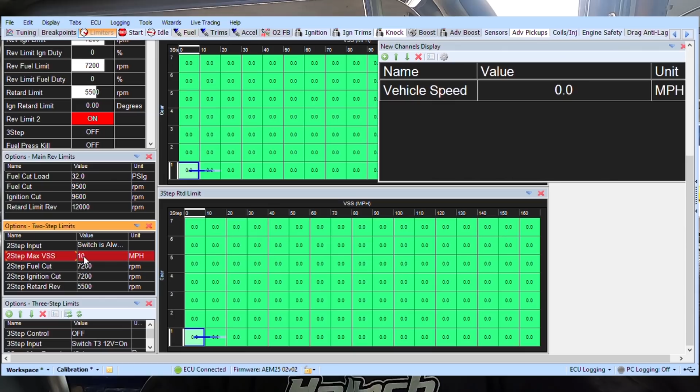So I had basically been told that the data was wrong, that it crept a little bit and the speed had gone way up, and so the 2-step let go. But I'm right now on the dyno, and I'm finding that the vehicle speed versus what the dyno says the vehicle speed is matched completely. So I guess we had to jump through these hoops to find this out, and I brought you guys with. We find out what I find out. I don't hide anything from nobody. Kind of part of the fun.

I think I moved the 2-step max to 10 miles an hour. Maybe that'll help him some, but I feel this thing's ready to jam.

But if you had to set this up because speed was all out of whack, you wouldn't be able to adjust the speed through the AEM, which would be nice, but they don't have that feature. So you'd get a Dakota digital box or something like that to translate the speed into something different, if you had different size wheels, tires, etc.

Now we have the speed sensor on the rear, and we use the Hall effect sensor, which is 12-volt power, signal, ground on the rear, same as a factory one in the front. And having the 4 pulses per revolution seems to work perfectly with just using the rear lug nut studs. So that's going to be that. Simple enough. So I guess that's a little tech tip from Brent, PFI Speed.

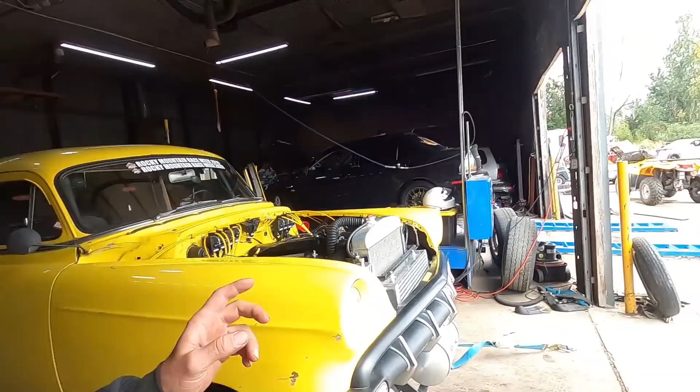And then we need to adjust the clutch too. Yeah, the clutch needs adjusted. Yeah, it's all the way at the top. Definitely needs adjusted. Yeah, I noticed that when I pulled it up yesterday. That's only, yeah, I mean, that's the biggest thing. That's a huge light switch, yeah. And he said that's something he screwed with before that last run. He did that and moved the seat. Yeah.

Well, at least we know the speed is on point. It's perfect. So, like I said, we used the all-wheel drive dyno to do that, coupled them together, drove it a little bit. Now we know, and knowing's half the battle. So we'll get on to the next thing.

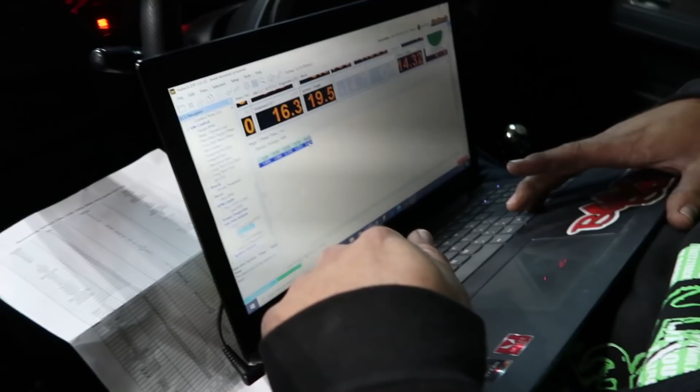All right, guys. So as we gear up for Raceweek 2.0, Rob is back with his old little hot rod, and he won the gasser class at the last race, which, congrats, Rob. It's pretty awesome. He's just gonna give her a little checkout right now. We're gonna make a pull or two. I think we're good to go.

So we got her strapped down. We're gonna add one more in the back here, so we got 4 all together, and then make a couple rips, and then off to Tulsa.

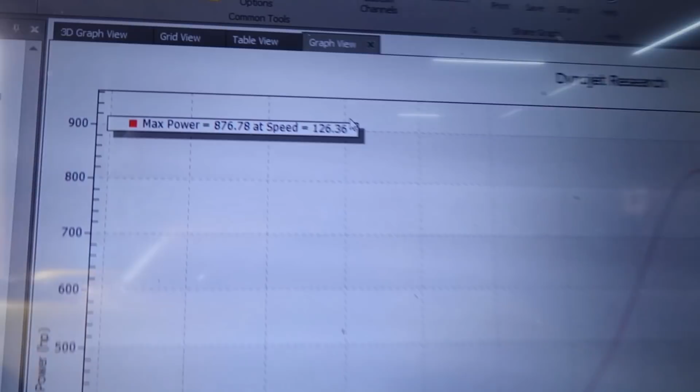All right, on top of having Rob's hot rod here, we've got Jonathan's on the dyno here as well. And they're switching it over to Haltech right now. Jamie's hard at it, and we might get to see where this turbo can really go. Pretty excited about that too. So he's working on getting it just a run, getting a base map in it, building a base map, getting it ready. All right, let's make some tugs on this thing.

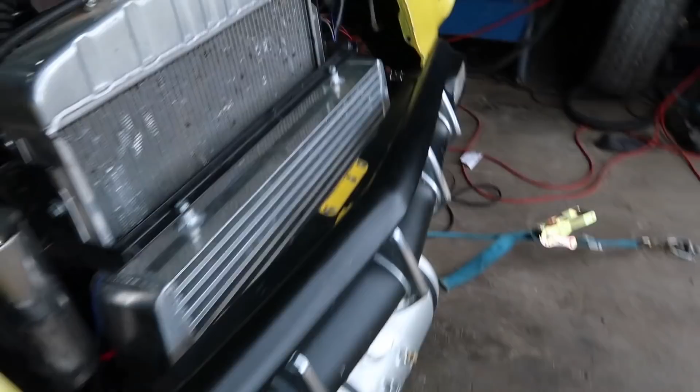What do we got? It's a tranny. My buddy filled it, he overfilled it. We sucked a bunch out of it. Okay, apparently it's still a little overfull.

Tranny's just puking some. It's overfull.

So you made 876, and then it fell really hard. And it sounded like a jammer.

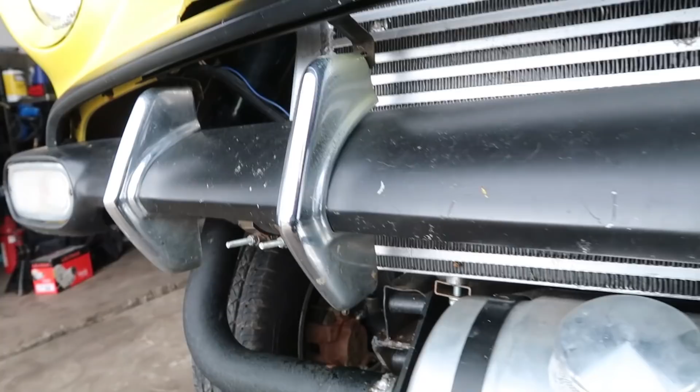All right, so we're going ahead and smoke testing this guy. It looks like, right down here - no, it's hard to see. We're smoking a little there. We got a lot of smoke up here coming from this guy. 2 or 3 pieces right there. Looks like everything else on this side's pretty good.

Well brother, that was 937. It still felt some at the end. Is it just losing boost there, you think? I'm not sure. Definitely got to find out though.

Okay, try to look at this log and find out what's cooking here. Heck yeah. Is that the most we made with it? By far. Heck yeah, good job boss.

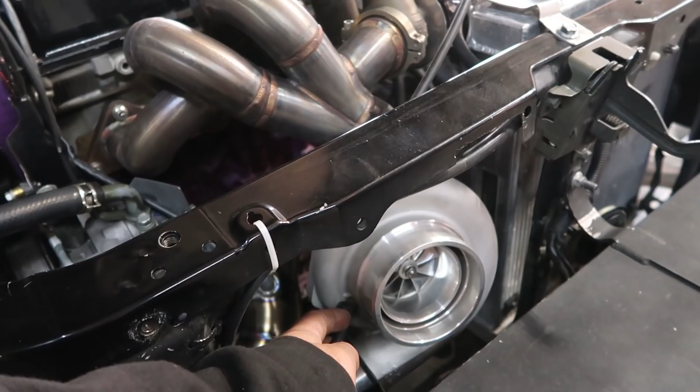He closed the gap and I put some dwell in it, so combination of the two. You're lighting it now. Yeah, and if I could do boost by RPM, I feel like I could pick that back section up, but it's all by time for the drag strip, so just want to try to clean up everything I can.

So just keep going from there. There you go buddy. Yes sir.

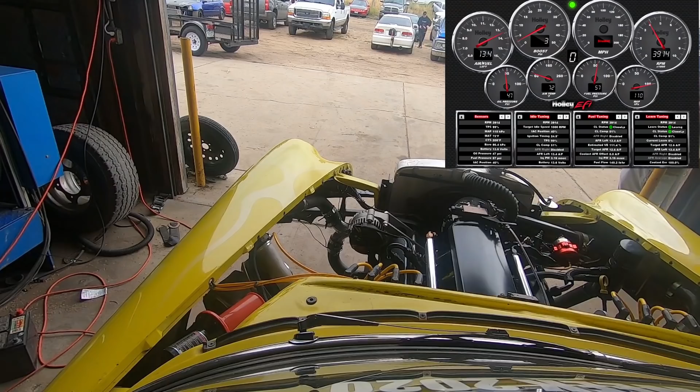All right Sean, so I made a pull and it went right to my boost cut. Oh yeah, and I told you, and you came out and looked. So this port on these Pulsar turbos is actually for a speed sensor. Yes, so it doesn't really have a good source right there.

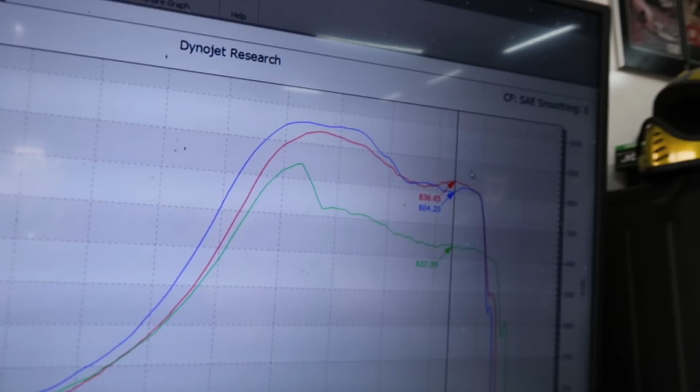So we're gonna pull the pipe off, and you're gonna weld a bung on the pipe, so that we can put the source there. So everything else is working real good, we just got to get a good source, and then we can get control of the boost. Jonathan's gonna go ahead and get this pipe off, Sean can weld a little bung on there.

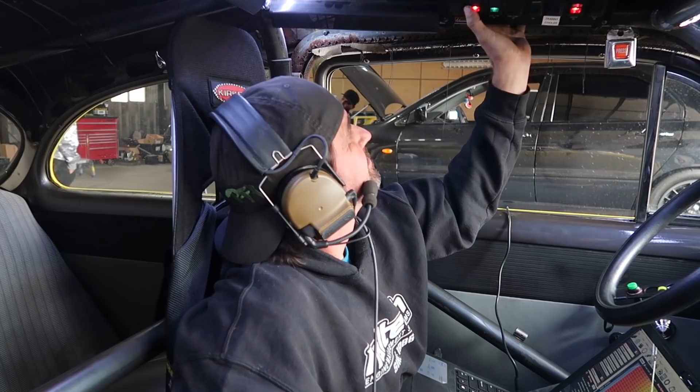Out farther. 959, sir. Carried out farther.

Trying to find your own. The beast. That's for sure, yeah, it is a damn beast. Yeah, I love it man. I do too. Trying to figure out the drop off. Everything looks really good.

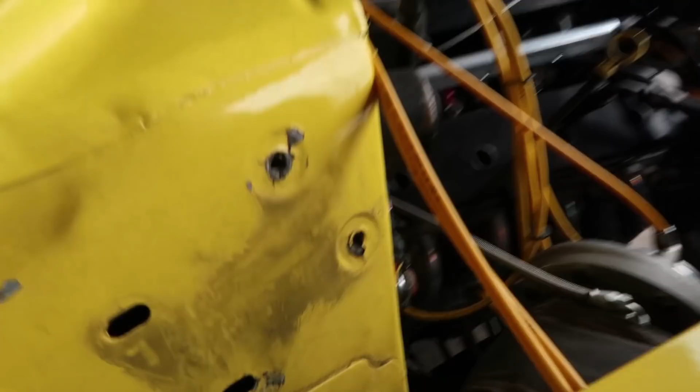Is it the boost falling out or? It does come down, it comes down about 2 or 3 pounds. Man, where's all this? Is this?

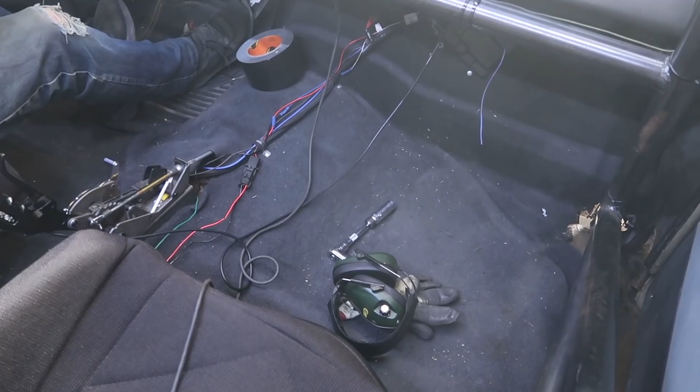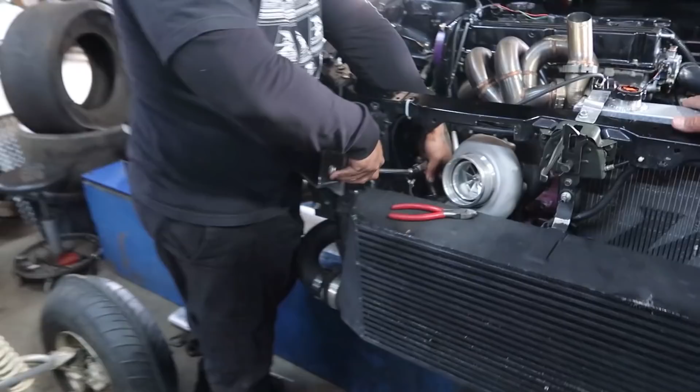Look around, thank you sir. I'm not seeing - you want to look around? I've kind of got some smoke inside, I don't know if it's just coming from the wastegate. Wastegate's blowing right back at the roll bar right there. I gotta get my hook on it. Okay, cool, cool, yep, it hits the hole in the roll bar right there, it's pointing right at it.

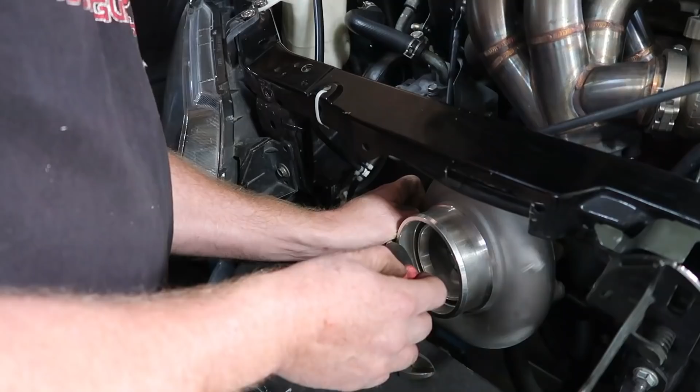Melt the carpet a little bit, yep, right there. Yeah, I got my pieces in for that the other day, and I just hadn't got that far. And we were out messing around the other day, and Chris was like, wow, there's a lot of heat coming in over here. And I looked over, it's like, oh yeah, wastegate's pointing right at your feet.

Oh yeah, you got a fitting on there for us. 3 days later - besides wastegate spring setup, you have any idea? No idea, we're about to find out. One zip tie, and we are ready to rock and roll.

Sean, you want to give me a zip tie? This thing's kicking.

You had 2 things happen to you - 36, you had 2 things that happened to you. The airline came undone just as you started, and then I had the kink, so I'm grabbing it and holding it up. First I plugged you in because I was like, what's kinking him? You weren't kinked, the air was undone laying on the floor. Yeah, that does unkink it. Yeah, so I was jumping around, running around. I got Sean, I'm like Sean, grab a zip tie, I'm holding it up.

That was what, 730? Yeah, 730 and 39 pounds.

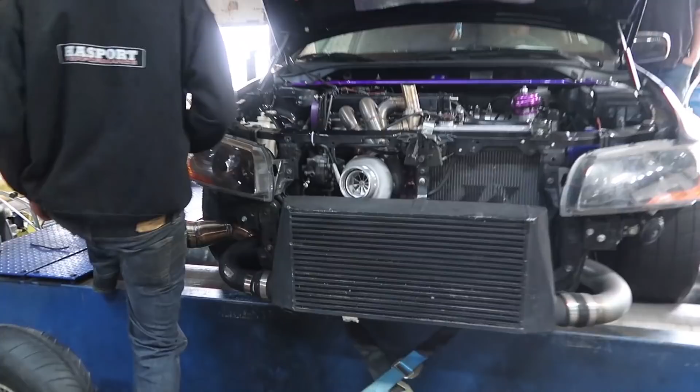Right back, right back with some boost control, not just all out.

736 with 684 foot-pounds. Woo, that'll get you going. Dude, I went 9.9 rich. Oh, clean that up, 72.

Yeah, find that power, and then overlay them with what the stock ECU did. He's got that good juice and alcohol. Nice.

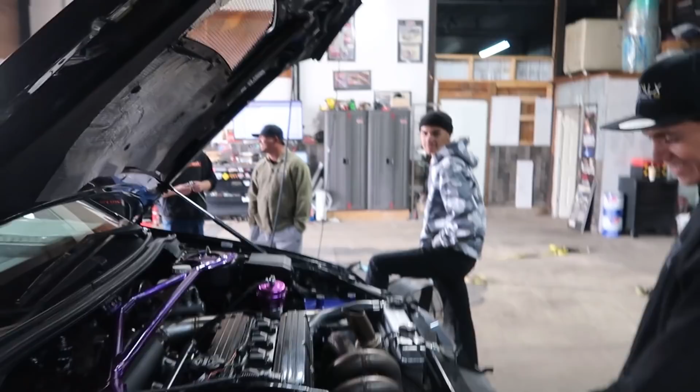Pulsar turbo for the win. Again, these little turbos work pretty good, dude.

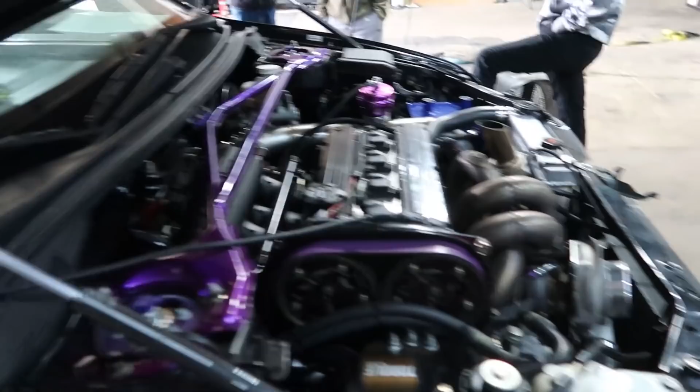So you know that one I tuned yesterday? Did they tell you what they did to me? No VTEC? No VTEC, and I spent all day working on it. I mean, it's because I had no VTEC. I kept saying it, man, the power seems kind of low for that. But I was like, it spooled so fast, it's still worth it, you know? And he's like, man, VTEC is seamless. Yeah, it was seamless all right, because it wasn't there. Damn, sure had a power band than it was though. It's wild, yeah I know, it kept going up too. Revved it to 9,400 and it hadn't fall off.

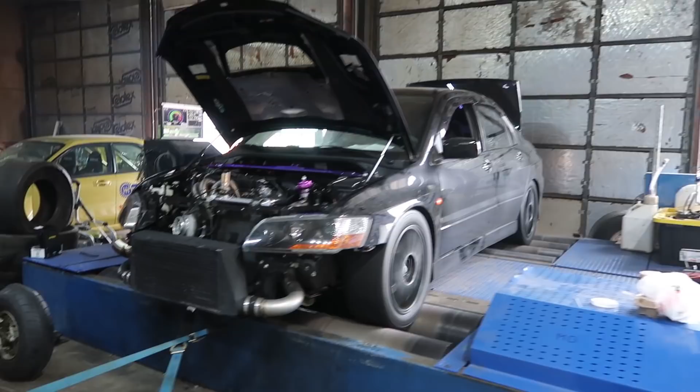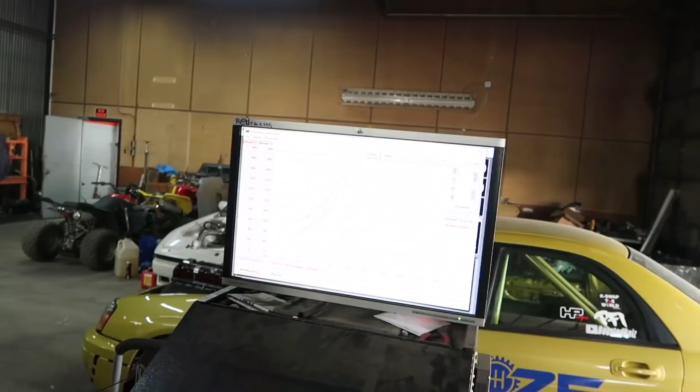Blows my mind. All right dude, well good work, clean her up, ship her out. All right, so Rob cleaned up his mess, and he's off to put it on the trailer.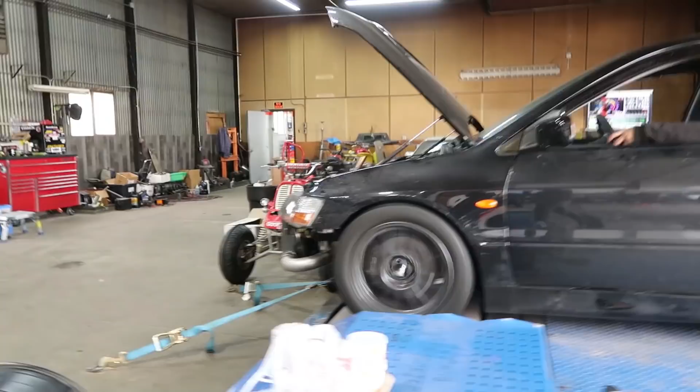Come on, baby. See, still went rich up top. Get it, get it.

It is cut. Who's cut? All right.

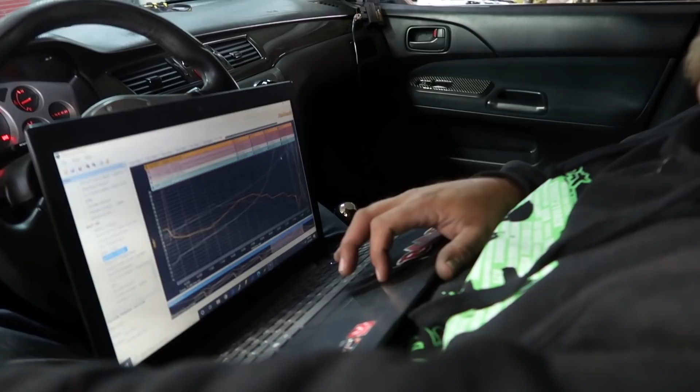806 with 717 torque. There you go, dog. So it just came up too fast, or? I don't think it could have been my boost cut. My boost cut's at 50. It wanted a little more fuel. I started to get out of it right then, because it was definitely some kind of cut.

What's that? That was only 39 pounds. How do you like that torque?

806, 717. What happens at 5,700? My cut's at 83.

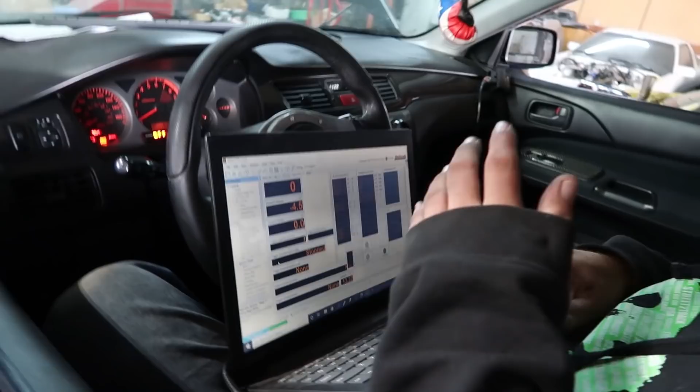The other thing I'm looking at here, on my ignition, I've got my RPM limiter correction, but it's 250 RPM away: 0, and then it pulls 1, 200, 2, 1. And then it's got an RPM limiter correction on the fuel, where 200 RPM before it gives it 1.

So the other thing we're gonna log is the triggers themselves, because maybe we're just losing sync up there. We'll check that as well, because what I added is a weird deal - sync level status and the synchronization state. Because as you get high RPM with that power, it just seems to run away where you were pulling all the way through, no problem before.

The only thing I've really changed is I added a degree or a degree and a half, and tried giving it some more boost. Well, keep me posted. All right, Jamie's gonna go right now. Let's check this out.

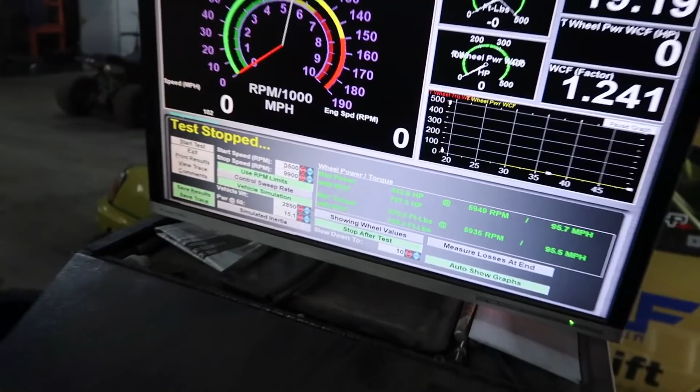At least we got some data in that time. Yeah, I stayed in it a little more. That just looks syncish, doesn't it? It does.

797 with 708 torque. But you guys saw how it came in and then it misfired and went away. Pull the damn plug, see what they gapped at.

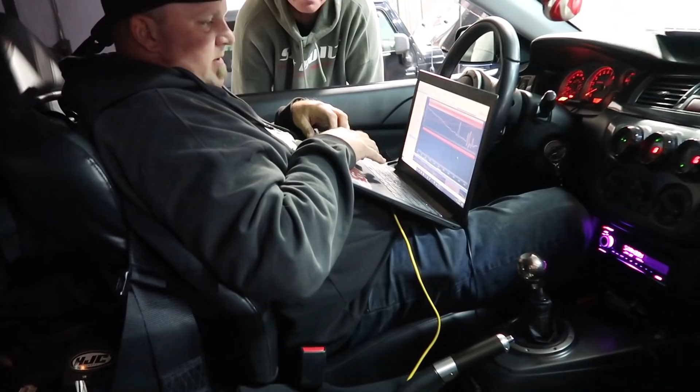Well, it sounds more like a cut than a misfire. But Sean said from over there, he heard a couple little ones leading up to that big one. I was listening pretty good - I just heard a cut.

Yeah, that's why I wanted to check the sync stuff too. We'll check the plugs, no problem. But it's fire, you know what I mean? There's definitely a cut, dude. That's what I'm telling you, dog. At first few times I heard it, that's why I wanted to check the sync.

It sounded like there was a couple stutters from on the other side of the wall to me. He's got data, good data. Yeah, see, there's that first stutter I heard before you came up. Those aren't stutters, those are cuts.

That's the cut - sync state shows straight there, sync level shows straight there. What about rev limits and stuff? Engine limiter? No.

Because man, if you can make this... RPM limit? No. Seems like the ECU, or a coil could be dropping out.

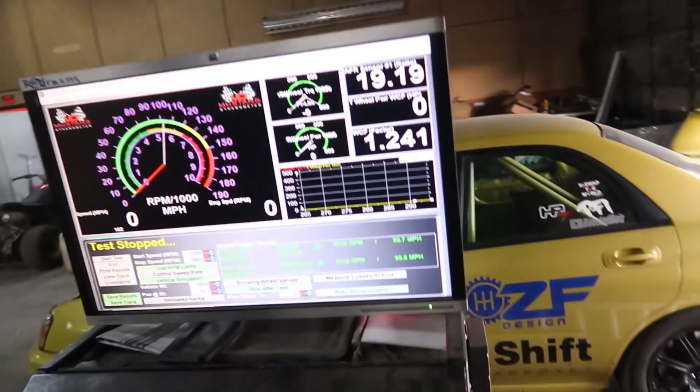Why? And my throttle, let me get my throttle, make sure I'm still on. My throttle's still on there. So the first one might have been plugged, but this one, what the hell is that?

The first one just didn't sound like it because it shot fire. That's my problem, it's shooting fire. It's not like a rich puff or anything - it's fire.

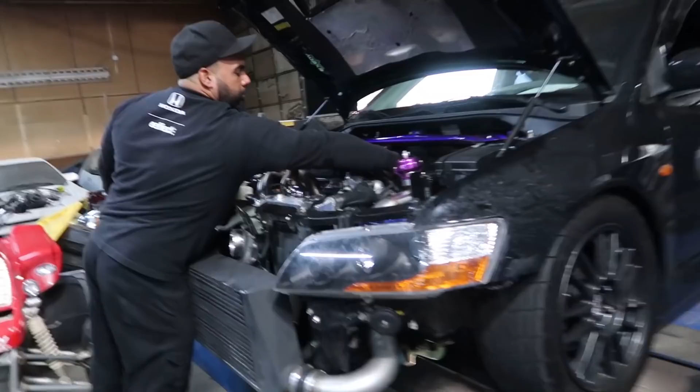Maybe you got to read a plug, man.

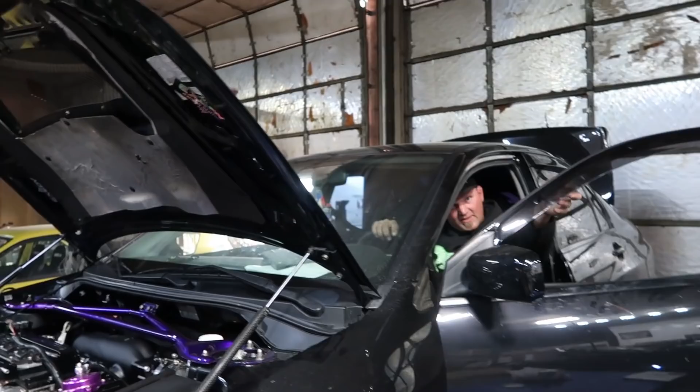Also on today's list, Samantha's little Jeep starter went out, so she got it towed here. Now we're changing it - she just pulled the ground off. We're gonna go ahead and drop the starter out and bust the little project out. I think we got a new one from O'Reilly's. Appreciate you guys hooking it up, I'm gonna get her Jeep going again.

Woohoo! But that's 91, okay.

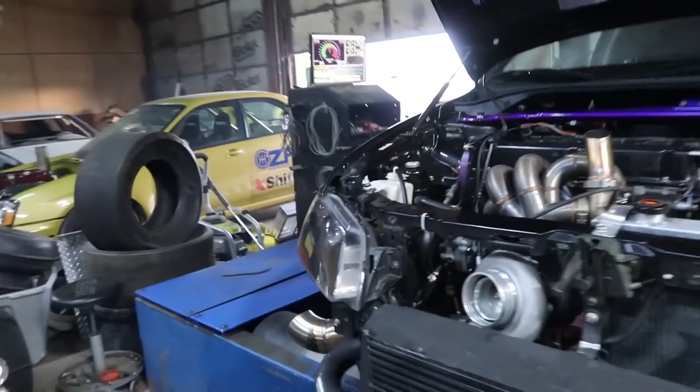All right, so Jonathan just changed the plugs, regapped them, ready to try again. I gave it a lot of fuel - see if that's it. Awesome, all yours, man.

Change this starter. Look at you, yeah, turning wrenches finally, instead of slamming keyboards.

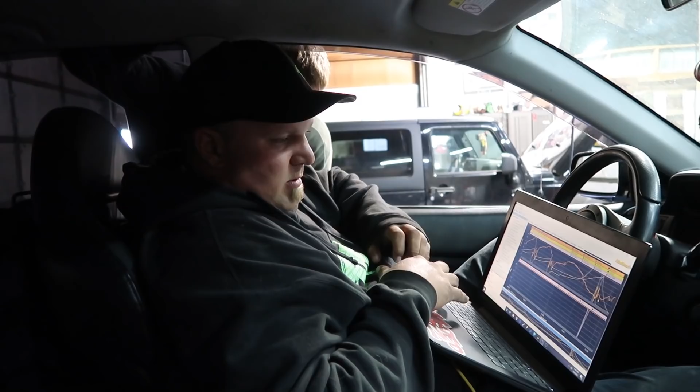770. Somehow I think it did the same thing to you, but you only gained 300 RPM? Yeah.

6666. Oh, that's not good. But then it cuts right there, and then it bounces right up to 7199. Hold on.

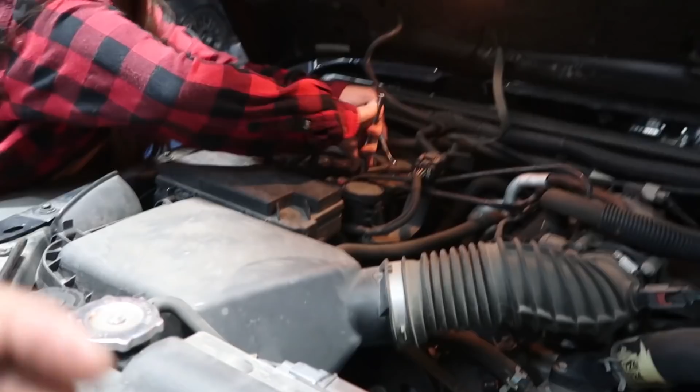How's that looking? 43 pounds.

The fuel is flat, and it didn't pull my timing out at the end. So that's 15 degrees. We're like 11.6 air fuel, 42 pounds. At 19 or 20 degrees, whatever you had, it knocked. So that's your ceiling. Yeah.

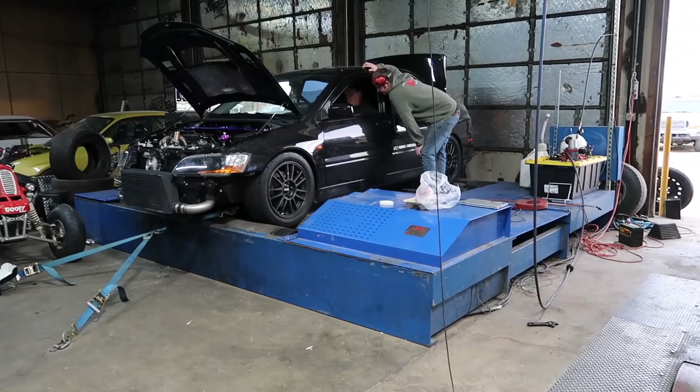All right. Now we can test it. It's probably good, snug as a bug in a rug. All right, let's try to start it real quick. Make sure it's in neutral. See if your old man still knows how to work on a Jeep.

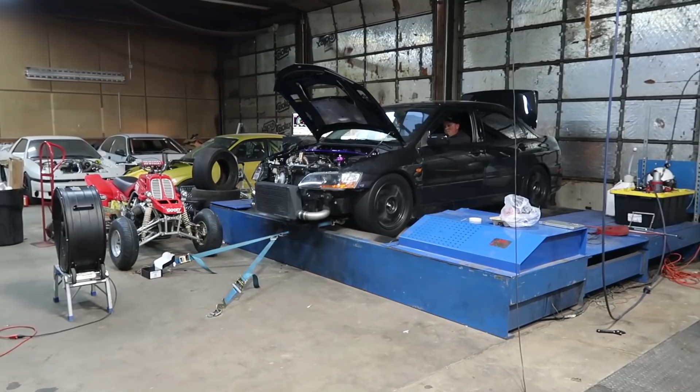Hey, sounds normal now too. All right, so we just need to get that core, throw it in the box, and go drop it back off.

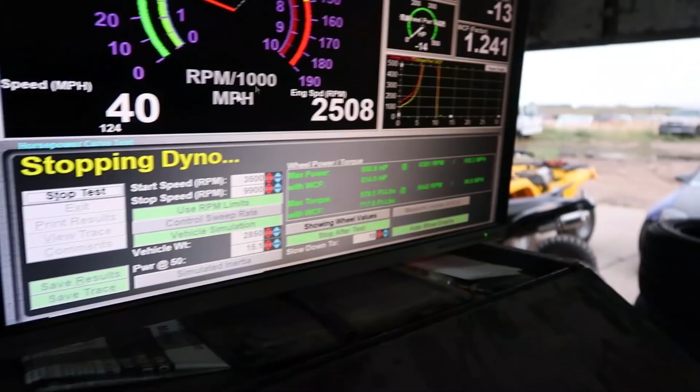All right, so we made a cam gear change, and they're gonna go ahead and rip it again. I think they changed the exhaust cam a little bit. Jonathan, how much do you change the exhaust cam? We advanced it 1 degree. All right, see what 1 degree advanced on the exhaust cam will do.

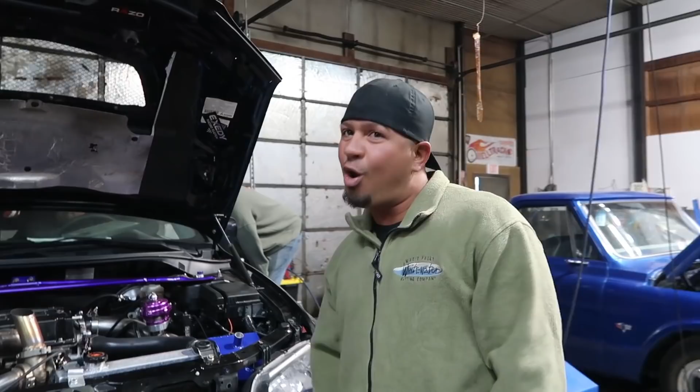See how you can catch it?

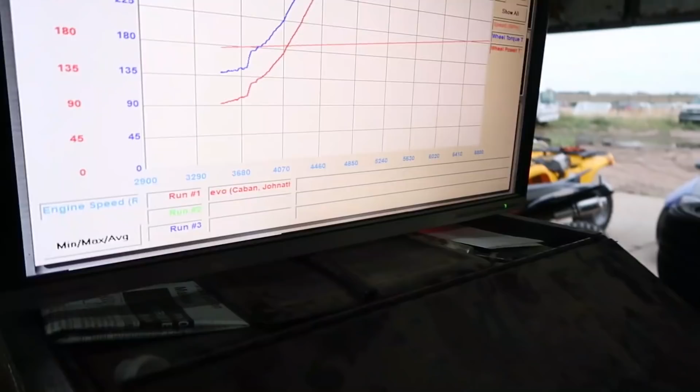Look at this thing. I don't know, but I think it's eating something. I zoomed all the way in on it. Definitely a bird up there. Bird's the word.

Sounded good, sounded good. That was it, dude, that was it. Gain 4.

818 with 725 torque. Yeah, what up? 818 with 725 torque. Torque went way up, that was the advanced intake cam 1 degree. No, we went on the exhaust cam and advanced 1 degree.

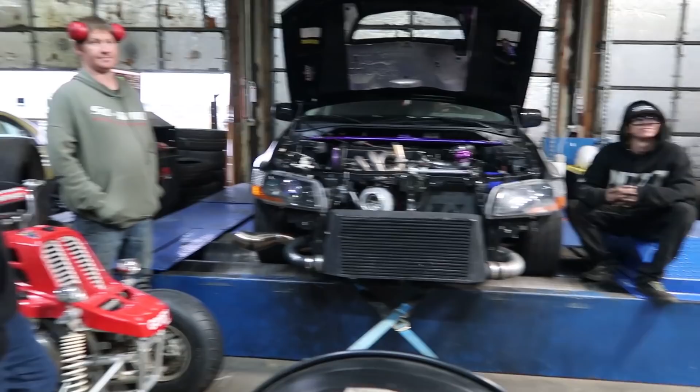I'm gonna do something with all that fuel now. She's a beast, man, we found some power. Because it was fast before. It was alright, it was fun.

9-second streetcar right here, that's the goal. On the mountain. On the mountain. Yeah.

Oh, 45. 45 pounds. You know, he needs the next map sensor. He's already at the top of the map. The top of the map sensor.